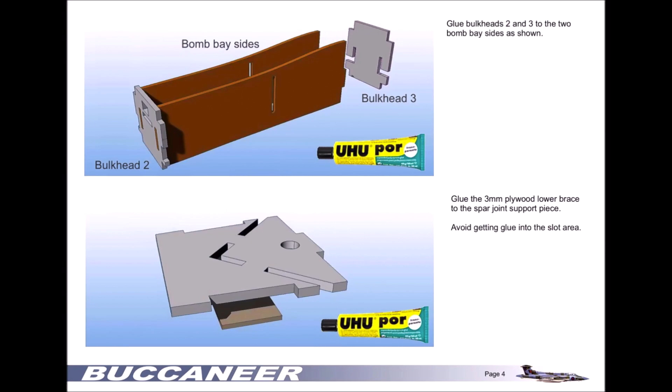I'll be using 3M spray 77 during the laminated parts. First step is to glue bulkhead 2 and 3 to the bomb bay sides, then move on to the plywood lower brace. Here I'm applying a small amount of glue, whatever glue you choose to use. I need to try some different ones, in all honesty. Onto bulkhead number 3, just the tall ends, slide them in and allow it to set.

Again, just a small amount on bulkhead 2, just enough to give it a good bond. You don't want too much. Wiped away a little bit of excess there.

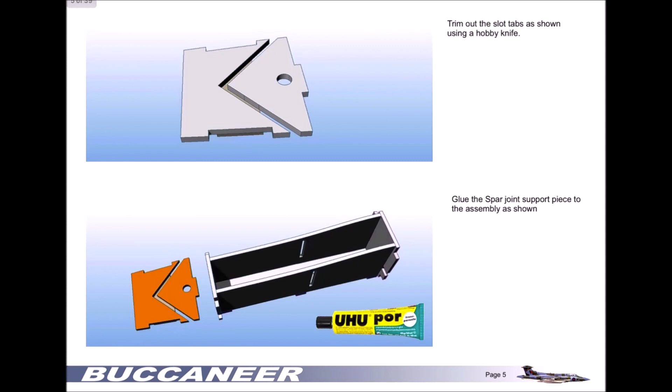Moving on to the lower brace. Here I'll be adding a small piece of 3mm ply, a spare part I had lying about in the hangar. Just try not to get any glue in the slots. Next we'll be attaching that to the bomb bay. On the support piece, add some glue and slide it into the slot.

Next we'll be doing the corner reinforcers, gluing it to one side of the fuselage assembly. I'm applying glue on both sides at the same time, just a small amount, offering the two of them up together and giving it a good rub so it's a nice even coating along the surface. That's the two parts done.

Moving on to the lower part, the lower fuselage corners, here I'll be using the 3M 77 adhesive. Very quick, thin coat of glue. Spray it on, and as you're moving it along, make sure you've got it in position. You don't have as much time with a liquid glue, but it's very good, especially when it comes to sanding - you don't have rubbery joints and stuff hanging out the side.

Bulkhead number 1, small amount of glue, attach it to the front where the nose is going to be. Just test fitting the bomb bay and the lower brace support - quite happy with how it fits. So again, small amount of glue on the tabs and the contact surfaces.

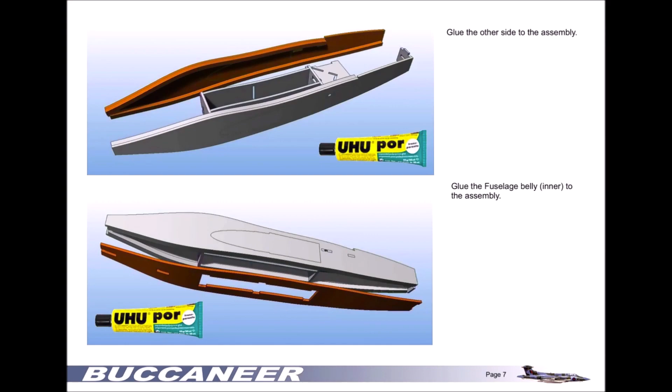Next we're moving on to the other side and the fuselage inner belly. Just like we did on the first part, small amount of glue on the tabs and also on bulkhead number 1. Offer up the side and make sure you slide into the slots, give it a good press.

Here I'm using tape just to support it and hold it together while the glue cures, making sure nothing pops off. I must try these pins. Then just at the front, bulkhead number 1, again a small piece of tape around the front.

The belly panel inner - I've actually cut out the bomb bay doors there, but I've not cut fully right through. As there's a slight curve on the belly near the rear, I'm sliding it across the table, forming it just to get that bend before I actually attach it to the fuselage itself.

Sometimes when you're laminating parts and offering them up, you will get the odd deviation, lump or bump, but just quickly use a razor blade and trim it off. Offer up the belly panel and slide it back and forward to make sure there's a good even coating of glue. Again, using a bit of tape, holding it down. As we've formed some curves in it, we want to keep it nice and tight against the fuselage - we don't want any spaces. And at the tail, just squeezing it together.

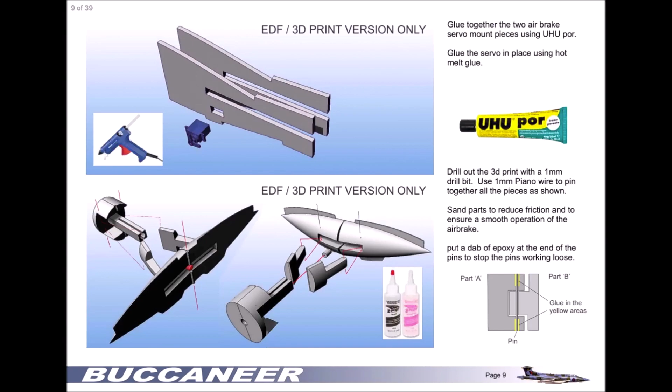Next, the 3D printed tail air brake. In this video I've used all 3D printed options - I love them, I think they're fantastic, it certainly helps speed up the build. Here I've used the tail piece itself and the hinges I'm working on. I've printed them in PLA so that it was strong - I wasn't wanting any failures, especially not in flight. I'll save that for the trees.

The air brakes themselves I've printed in lightweight PLA. With the small holes there, I've got a 1mm piano wire - servo push rod actually, I'm sure it's 1.2mm - but these ones are quite tight. I like to keep the front of it nice and tight. The back ones I'm working on, the brake itself, again the 1.2mm push rod slides in pretty well, nice and freely. I've cut it so it slides into the brake itself and hides it, so I'm not having to trim any away later on in the build.

Just pushing it through. Quite happy with the movements, everything moves nice and freely. And then the tricky part was the hinge.

Once I had the hinge together, I actually used a small hobby drill piece just to drill it out a bit to make sure that the push rod slid through pretty good.

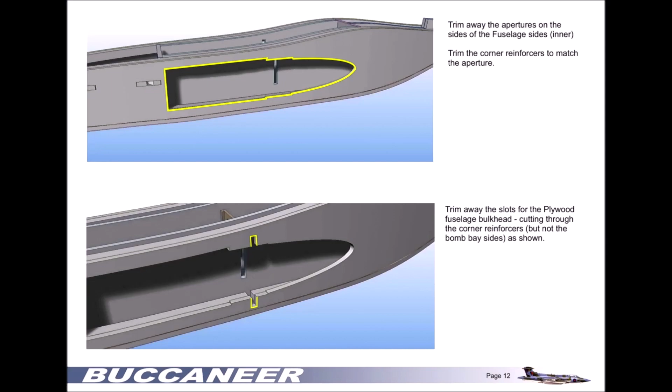I had them working, but it wasn't full operation, I think it was about 65, so I had to recenter it, design another one, and put on a 35mm extension arm. So they're just a wee bit better, attach a tailpiece, moving on to the sides and trimming away the slots where the EDF is.

It's quite difficult to see. You may think that I'm just crazy and cutting away. However, I had pre-cut it with the template of the plans.

And as you can see, it just pops off. There was a couple of edges that I just left so it was held in place. And then the same with the opposite side, pull that off.

Here, the spar bulkheads, 3mm ply. This build I've used, again, the 3D printed option. Originally on the first Buccaneer I built, I used the 3mm ply, worked fantastic. So with Craig's 3D printed parts, I've never had an issue with any of them yet.

So here, let's give it a go. On to some epoxy, mix that up. A little bit on the insides.

Slide it in. Quite happy with the fit, and then just in with some epoxy in the centre just to hold the two spars closely together.

We clamp just to hold it, make sure it's held nice and tight until the epoxy cures. Next step is the forward fuselage outers and the rear fuselage outers. Quick, simple process on the forward side.

From the couple of tabs, it gets feathered out to the back, which I've pre-done prior to shooting this. So on with the rear supports here, there's markings on the plans that show you where they should be aligned. There's a front. Again, we're using the 3M77 spray, so a quick spray, put it on, and it's stuck.

Here we're going to add the 3mm lite-ply brace to the upper part. As you can see, I removed the tabs. We're still doing the opposite side of the forward fuselage sides.

Again, on the top, just the support parts that hold your wing spars, just a spare piece of 3mm ply. Glue that in and just leave it to set. Then we should be moving on to the bomb bay reinforcers, sorry, the bomb bay end stops.

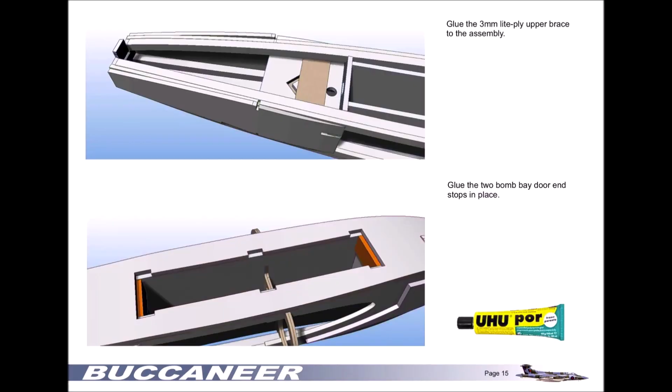So there's the forward and the rear end stop. Just measured it up, and unfortunately at this point you can see I've put glue all around the surfaces. Slide it in. As I hadn't actually removed the bomb bay doors, I was actually gluing them shut. Unfortunately, yeah, the bomb bay was one of the things that I was really looking forward to. However, I've just glued it shut.

Not to mention, as we go on here, while I'm sorting out the extension wires for the air brake, while I tidied that up, I actually taped it on the top and just got excited straight away and ended up covering it up and fixing, attaching the top piece.

So here's the extension arm that I'm putting in for the elevator, sliding it under the EDF bulkheads. And this is me getting ready for the tailpiece.

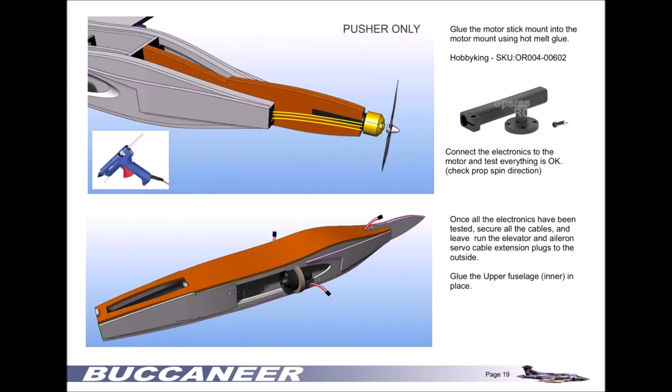Tape that up and just mark it so that when it goes through the front, I know which cables are for what on the receiver. So there's the tailpiece, and we're just moving straight on to the top panel.

As you can see, I'm just test fitting it, eyeballing it up with the vertical stabilizer and where the cable is going to go for the elevator servo. Cut that out. There is a small circle on the plan, however I just cut out a wee rectangle just wide enough with a wee bit of space to let the extension cable pass through.

Like I said earlier, now that I've glued the bomb bay doors shut, I was just carrying on and gluing the top. So here we are, back to the canopy part, the pieces that I cut off earlier.

I had a quick glance through the video and, sorry, the build guide, and seen nothing for any reason for it to be off. And I think when I trimmed, sized up with the top panel, I kind of noticed that there was certainly a gap missing.

So now that I've smeared the glue all along it, and given it a wee spread out with a scrap piece of foam, just so it's a nice even coat. Line it up with the tooth at the front and bulkhead 1, and again using some tape just to hold things down.

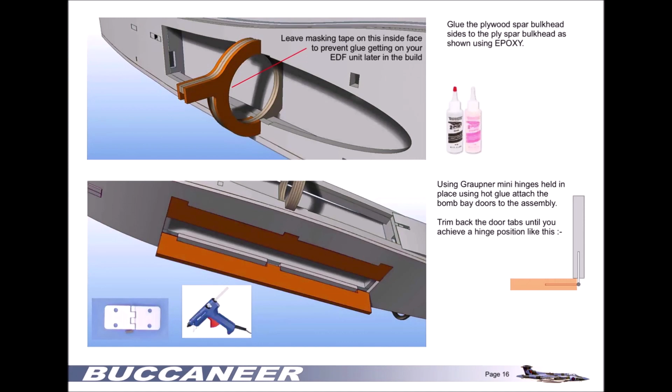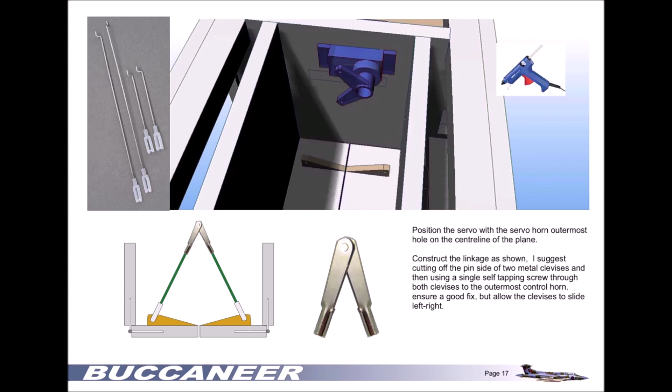So onto the plywood spar bulkhead and the bomb bay doors, which we won't be doing, unfortunately. I'm pretty sure you'll understand how to fit hinges and a servo cable and a couple of arms to operate a double door. So apologies, guys.

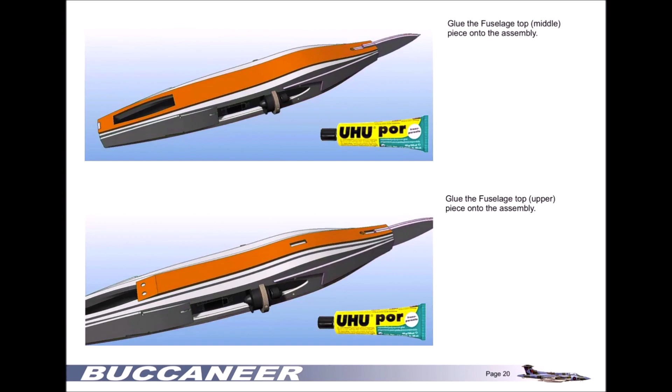Next step, moving on to fuselage top, middle and upper, now that I've already put the inner on. Again, like the other pieces, what I've done is formed it against the table, just to try and get the curves in there before we put it on.

And here, as you can see, I've just attached it. I'm holding it down. I've used the 3M77 spray adhesive. I think it's fantastic when it comes to laminating. It's a very quick process.

Here, just a squirt of glue at the tailpiece. Again, forming it on the edge of the table just to get some curves in it, so that when we attach it, it's not actually trying to pull back.

Again, hit it with a light coat of the 3M77 spray. Offer it up and lay it down, give it a good firm press, and it's attached just like that.

Here we are just trimming out additional space for the servo extension arm. Another quick press and I'm happy that it's stuck. If I was to use liquid glue, it would take a bit longer.

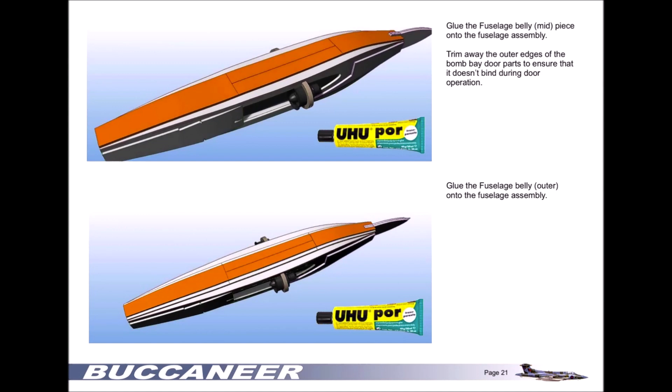Next step is the fuselage belly, the middle and the outer piece. I'm attaching that to the assembly. As you can see, there's unfortunately my bomb bay doors that will no longer be working.

Test fit. Quite happy with that. In fact, it's not actually a test fit. As you can see, I'm rubbing it from the front to the back. I've sprayed that with 3M77, and it is pretty much stuck.

Turning it over, just pushing it against the build surface, so it's nice and firm. And on the outer panel, again, hit it with some of the 3M77.

Reform, just to get that natural curve. I think the Buccaneer's got a fantastic shape to it. Low level bomber, love it. Unfortunately, I'll not be dropping paratroopers out of this one.

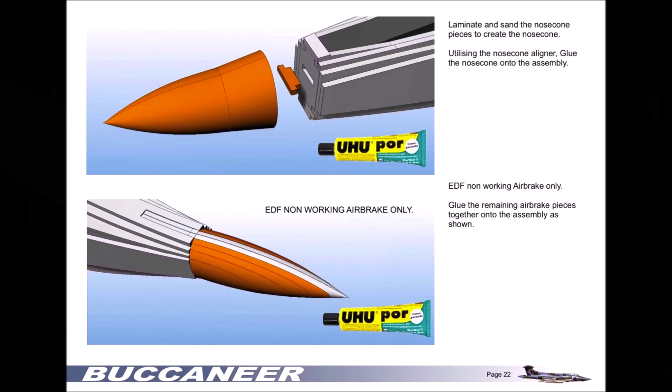Gutted. Anyhow, moving on to the 3D printed nose cone. We've already attached the air brake. Printed this in lightweight PLA, you'd be lucky if it's 4 grams maximum.

Nose cone aligner. Wee bit of glue on that, on the inside, and then a good amount round about the outside of the surface on the nose. Wee extra touch on the nose cone aligner. Slide it into position.

And then the upper bridge. A wee bit of UHU, slide that in, and line it up with the nose cone.

Next step is the canopy. Again, surprise, surprise, I have 3D printed one. So here I've lined it up to the nose bridge, and I'm just using a pen round about the outsides here, marking off where the canopy is going to be and the intakes before I actually get to shaping and sanding and things. Unfortunately, it's not quite as the build process goes, but it's just my thoughts and processes of how I build. So apologies if I've not stuck to it 100%. However, I have covered all options in here.

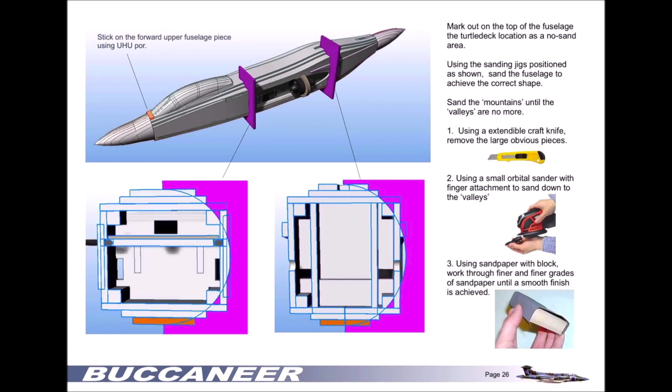So on the sanding part, as you can see, I was using a razor blade, just trimming away the sharp parts, and then used a bit of sandpaper, just a rough sand at the moment to smoothen it down.

So onto the vertical stabiliser. I have the 6mm piece and the two 3mm pieces of Depron. Again, attach the servo just to make sure it's centred okay. Yep, happy that that's working. Most importantly, that the servo's actually working.

So again, just on the radio, I'm just centering or resetting the travel on the elevator. In this Buccaneer, you don't need full throws on the elevator itself. Handles very well in pitch, so I think it was maybe about 50-60% throws or servo travel I actually had on it. So I was just resetting it.

Out with the 3M spray, just spray the 3mm side and attach that to the one side of the 6mm vertical stabiliser.

Just attach the control horn and linkage stopper. Test fit it into the vertical stabiliser. I did a little bit of trimming just to make sure it fitted properly, and then offer up the opposite side of the vertical stabiliser with the 3mm piece of Depron.

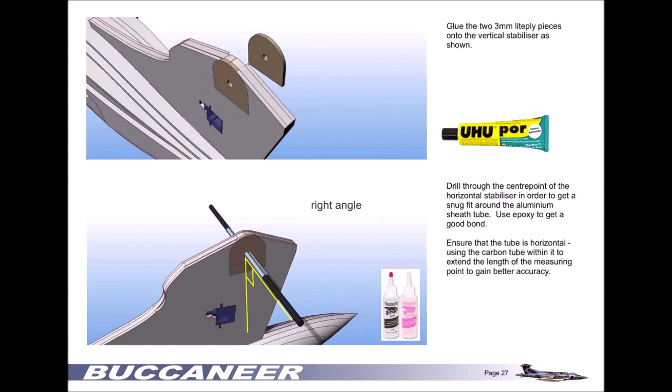Small weight, just let it set, let the glue cure. Now we should be using 3mm light ply pieces. However, as you can see there, I've 3D printed them. If Craig's going to supply it, I'm going to fit it.

Hook it up and make sure that your servo's running and it's operational. As I've twisted it up and down, there was a slight, not binding, but you can see it biting into the vertical stabiliser, so I trimmed it away.

Now with 3D printed support, I'm just using a pen to mark out where it's going to be centred and just cut it out. A wee file on the inside. Here we are with some epoxy.

Small dot of both, give it a good thorough mix. And then just apply it to the surface. I was actually staying away from the hole itself and then decided to put some through it.

Unfortunately, as I pushed the centre rod through, it's going to pull some epoxy through with it on the end. So I had to clean that off. So using two boxes, I'm just centering the vertical stabiliser, making sure it's vertical, and that the carbon rod going through it is perpendicular at 90 degrees to the rest of the build.

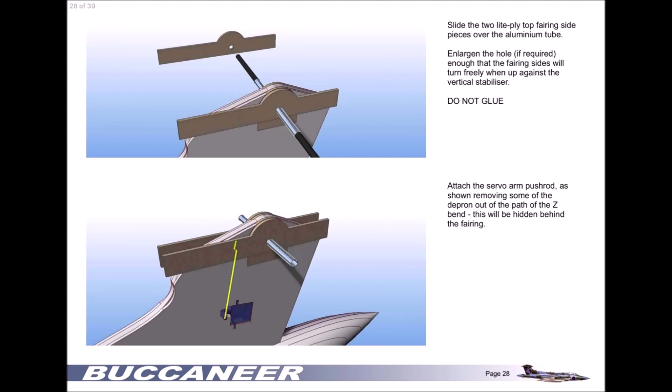So on the original build I used 3mm ply for the elevator. However, I 3D printed the lower one and the top part. They look fantastic, and I can't wait to see this in action. Now there is a slight curve, a wee bit of shape to them. Craig was getting all fancy with these designs.

It looks absolutely stunning. So I offered it up and just marked it along the insides of the tail, just so that it was matching up to the bottom housing. I have trimmed away a small, it's not even 45 degree, probably about 30 degrees. You can see there, I'm just trimming it away with a razor blade, just a trailing edge.

Offering it up to the bottom housing. And it all looks pretty good. So again, moving on to the other parts.

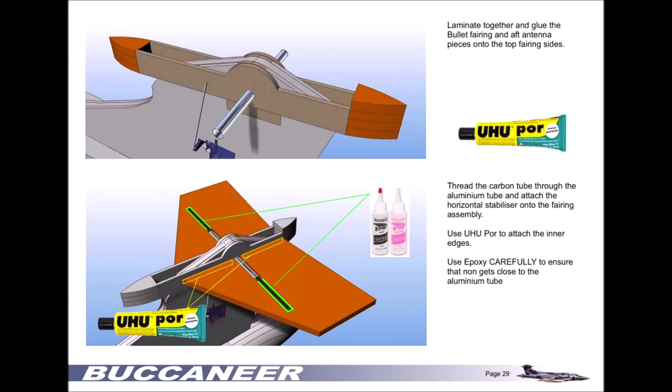We have the rod through it. It's been epoxied in, the servo's in. I've sized up the mount, and then once it had set, I looked at it and thought, how do I get this on? That's how it should go on. But so I was hit with a dilemma.

Do I cut it in half and put it on and glue it to the top part, which should hold it? But sat, had a cup of coffee and thought about it for a minute. Then realised, fortunately, I've just used UHU, so very carefully pushed the servo out, trying not to damage the vertical stabiliser itself, which worked, fortunately enough.

Just remove the servo arm because there's no way that's going to squeeze through the bottom mount itself. It's certainly not attached to the servo anyway. So just adjust the cables, pulling it through. Move that to the side. And then magic it on, making sure it's in the right orientation.

Squeeze the servo through. As you can see, I've got the control rod already attached to it. That was one of the reasons I decided not to cut it, as it's, you could say, a structural piece.

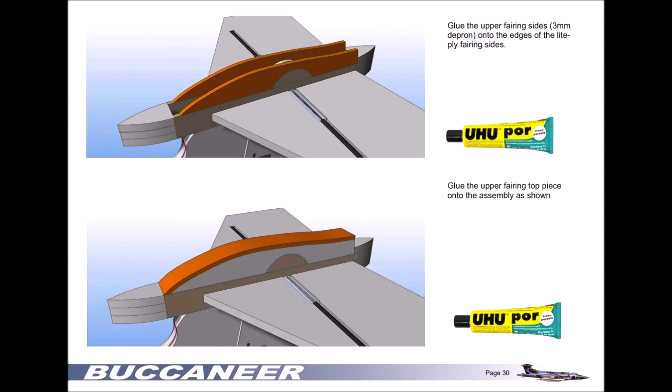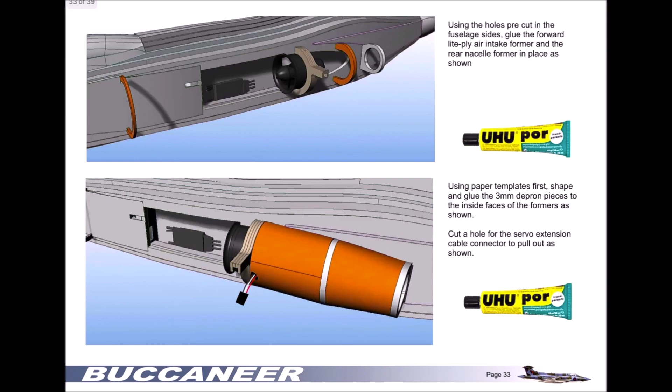So next step is the turtle decks and the thrust tubes. So I do jump about back and forward in this video, so apologies for that. I have actually again 3D printed the thrust tube.

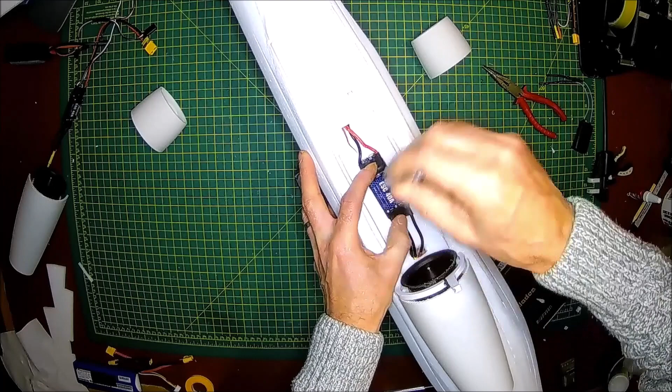I've got the 50mm fan inside, so what we've done is we've just attached the thrust tube, fed through the ESC, and just marking out where I'm going to attach it, so that there's a nice bit of clean air moving across it, and it's certainly not dangling about and getting a chance to get sucked into these awesome 50mm fans, because that would be epic.

So just trimmed it out, use a pen, mark it off, get a bit of hot glue, and then just a wee bit on the undersides, and then push it in, and then support with a wee bit additional round the outside.

One worry is with the hot glue that if you haven't got enough air across your ESC and it's not rated well enough for the motor, then that heats up, the hot glue heats up, and before you know it, you're sucking an ESC through your fan unit. So hopefully this won't happen.

So while we're holding on to it and letting the hot glue set, just removing any of the strands of hot glue that comes away. And there's the front.

3D printed insert intake, just attaching them. This is actually later on in the build guide, however taking the opportunity to go with it. Back to the horizontal stabilizer.

So here again, now that the extension's in and the unit's pretty much sealed up, just checking it again. When I'm using extension cable, I'll put a bit of hot glue on the extension itself - you can get clips but I've run out, so just using hot glue to secure it, then poke it through that wee hole, pull the wire through, and test fit.

So this part was quite tricky. As you can see, I have shaped and sanded the fuselage a bit. However, there is a wee bit of flat surface on the belly panel, but as we're lining it up, if you're pretty good on the eyeball, you can see the vertical stabilizer does slide off to the right a bit, but I'm pushing it to the left so that when you look through it, it is set vertical. I was quite happy with that.

So onto the turtle deck. Now that the vertical stabilizer's in, put the 3D printed canopy in place just to make sure we're lining things up right. Get the inner turtle deck, spray it with the 3M 77. Voila, stuck. You do get a couple of seconds, 30 seconds at least, just to slide it into position if you're slightly out. And then the next step is the middle.

I was putting a wee slight curve on it because there is a bend in the fuselage there, just to stop it from popping off. And then hit it with some 77 spray. Line it up to the rear of the canopy. I could have left possibly a millimetre there, because when I put on the clear canopy, it's quite tight.

So onto the top part of the turtle deck, which gets feathered out. You might see a faint black line there where the pen was. However, you can see a bit there where it snapped when I was sanding it. But a bit of glue, you stick it down, it's fine. Like I say, when you're laminating parts with the 3M 77 spray adhesive's fantastic.

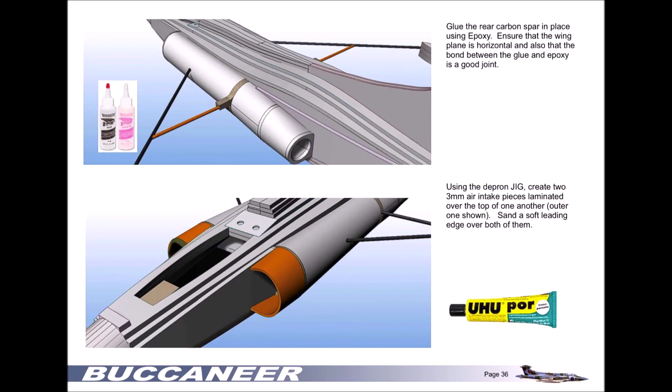In this part we should actually be gluing in the rear spars and attaching the intakes, but as you can see I've already done the intakes. I've glued the spars, but just moving on to the nacelle covers, I've actually added small strips, top and bottom, 5mm foam, just to hold the nacelles itself. So offering up a 3mm piece of foam just to the bulkheads there, just to measure it up and get it lined up in place.

You can use a sheet of paper, but that's double work for me, so I like to use a piece of foam that I intend to use in the build. Put in a small piece of carbon spar with a sharp point, so when you offer the nacelle up to the side, it pushes into the foam so you can see where it's due to go. We've got the wing spar in there just to try and size it up, but in all honesty it was getting in my way, making a squeaking noise as it rubbed off the foam, so we just got it out the way and removed it.

Attaching it, a wee bit of hot glue along the top of the formers I've made, just offer it up and hold it till the hot glue goes off. Don't worry if there's any lumps or bumps, we'll take care of that later in the filling stage. Once you've got the top side done, turn it over. As you can see, I've got an excess there, so just squeezing it against the fuselage and marking up where I think it'll probably meet up. However, I'm giving myself a couple of millimetres additional just so I'm not left short.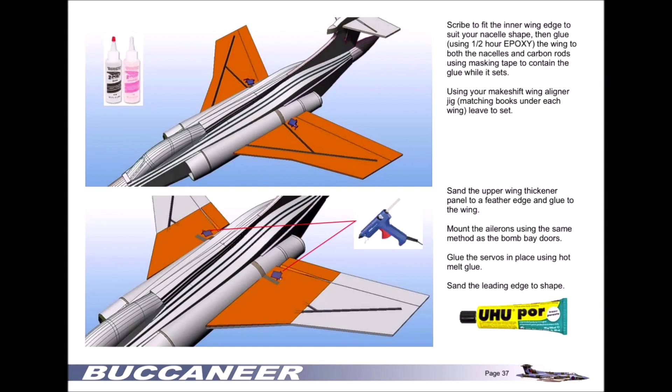Good on both sides, so carrying on with the wing. Again, it's quite tricky with the servos, with the hinges and the two rods itself. So just marking up where the servos are due to go, where the servo arms will be. I've got the 3D printed hinges that Craig's provided as well, this is the first time I'm trying these. So just marking on the wing plate where they should go. I've moved along, shaped them all, cutting out the spaces. I've left maybe a millimetre each side, not an absolute tight fit, because obviously I like a bit of movement.

Once the epoxy's set, looks pretty good. Push them in - yep, happy with the test fit. I will be mixing up a wee bit of epoxy, I think I already have actually, and then just putting them in and allowing it to set.

Now on to the exciting part. I'm using a fair amount of epoxy here, I think it was about 18 to 20 grams. I mixed up one big batch, and the intention was to do it all in one go. However, in doing that, unfortunately, what I should have done was do the underside of the wings, glue it upside down. As you can see, as I usually do, I tape off the holes in the wing plate for the spars, so I can fill it with epoxy and make sure it meets out to the edges of the control surface, so you get a nice, absolute clean finish. However, I'm actually not going to get a nice clean finish on the bottom of the aircraft this time.

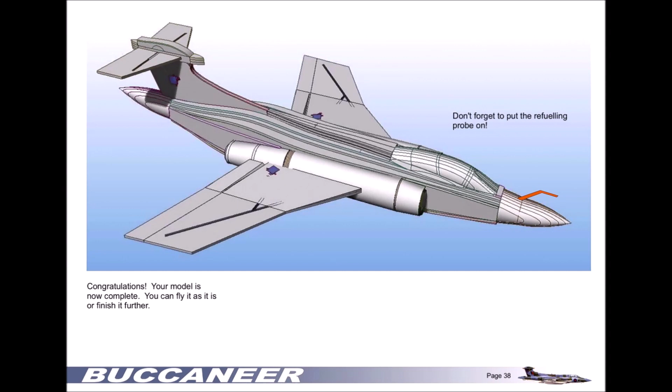Fantastic model. So here we are, time for a thrust test. Checking the surfaces, all the surfaces are working fine. Let's see that brake.

Awesome. Looks fantastic. Throttle armed. Right, let's try it.

So just holding it, I'm actually holding it just behind the CG here. Just a bit, well, just over half throttle, and it was pulling up, so there's a good bit of thrust. Moving my hand forward to the CG area, just over half throttle, and it's holding its own, so yeah, she's going to fly well.

Punch it. Yep, plenty of power. Fantastic. It's going to be a great flyer.

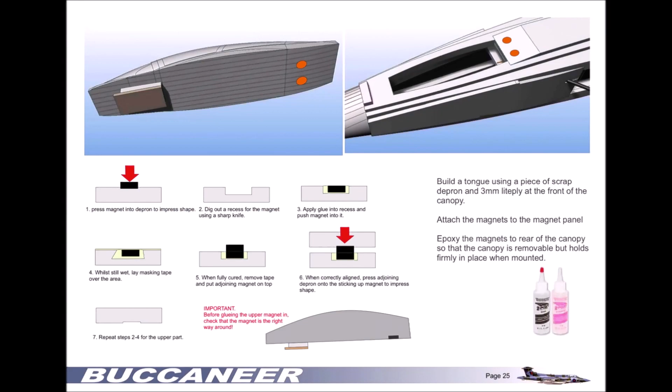And here we are, jumping back to the canopy. So yeah, so we've got the clear canopy from Craig. They're superb. On the cutouts, I'm using the canopy top from the original cutout, not the belly panel, the top panel. And what I'm doing is using that as the base for our cockpit.

So I've had a piece of foam, put the 3D printed cockpit on top of that foam and cut round it very, very closely.

Hit the canopy top with some adhesive spray, and then slide the canopy base on top of it. That'll stick nice and firm. And there we go, we've got a cockpit ready to go in.

I will attach two magnets, one at each end, but it's a very tight fit, just like that.

So a couple of 3D printed pilots, trying it out, sizing it up with the windows where I think they should be. There's their heads rolling about, a couple of seats.

Wee binnacle for the front, control panel in the wrong place. We'll move that to the back seat and give the pilot something to look at instead of the back of the seat, because he's the one dropping the bombs, even though I've not got bomb bay doors.

So just marking out seat, pilot 1, pilot 2, seat, just so that when it comes to cutting it, I know where things are going.